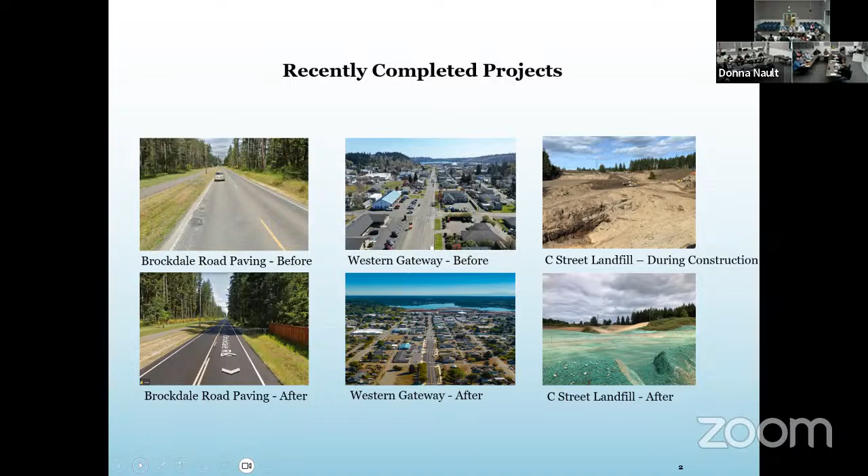So then Aaron's doing the odd slides. Aaron. That's fine, thank you. Hi, councilors, mayor, appreciate your time here. The AMI project is basically... how many connections do we have?

2,900? 3,839 meters. Got it. So part of this project is we had some old infrastructure, old meters that have been in place. Typically, the registers on those things, the battery life is 10 years. And we have basically elected to go to new metering. The problem with the older meters is they get a little bit less accurate as they get older, as the batteries die off. The other benefit is the new meters themselves, I believe, have a 20-year battery life. So we will be saving a lot of money. The other benefit, and you can look at this two ways, I guess, as the water utility, if there's better accuracy, it's going to help us as far as revenues and expense credit.

So what people see, the tendency, and we're not alone, other jurisdictions experience this when they do a massive transfer like this, sometimes revenues bump up a little bit, just because they're better metered. Our intent is we've purchased all of the meters. What we'd like to do is purchase meters, boxes, all the elements we need to do a complete swap out. We just purchased the last 400 or so units themselves. Now we're about ready to go to bid to have a contractor come in and do a lot of the work for us as far as doing those, as much as our remaining budget will allow. The parts on this project were expensive.

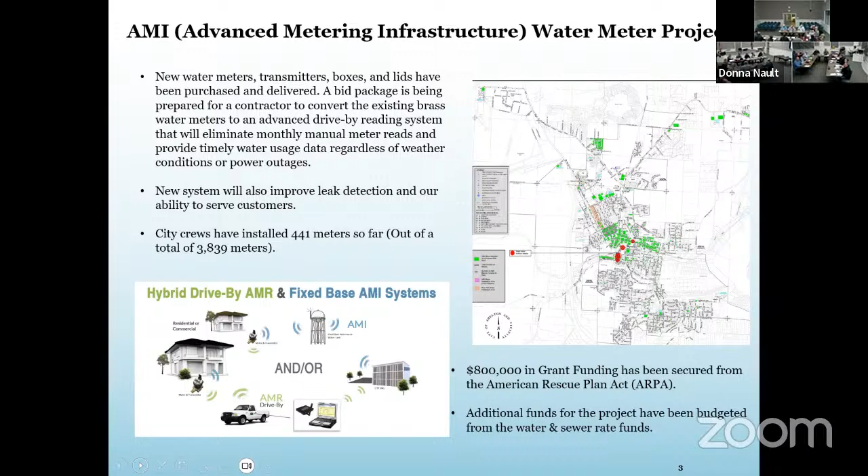So, the high school tank project went out to bid, and council awarded the bid. We had a pre-construction conference today and worked with Rognlin's to go over their schedule.

If you look at the map on the left, we're starting all the way up at Well One. We have to dig in a pipe from Well One to Shelton Springs, and we're replacing the steel line in there right now with ductile iron. Then from Shelton Springs, there's a carrier pipe approximately 20 to 24 inches in diameter, varies. It's a gravity water line right now, and we're using that as a carrier for the HDPE pipe.

So we're fusing a 12-inch HDPE pipe together. It's going to be one big long linear pipe, and they're pulling it through this carrier from Shelton Springs, near the top there, all the way down to the high school reservoir, at the intersection of K and 13th Street, Shelton Springs.

So anyway, tremendous amount of pipe work. This project has been in the capital improvement plan since the 2010 comprehensive plan. The benefit is we get a pressurized main going from Well One all the way down to the high school reservoir, whereas right now it's a gravity line and it's an old gravity line.

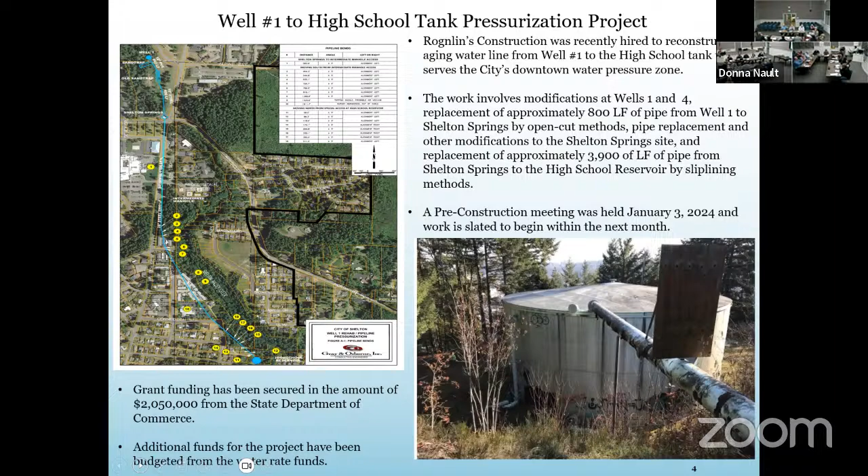So, keeping in mind this notion of our reservoirs and what we need to look for, as I mentioned to the council, and I think you all were at the last meeting—we do have some pressure issues, some fire flow issues, some storage deficiencies in our Angleside pressure zone, and that's identified as the colored area through there.

We do have this particular project, of which we were awarded about $2 million, if I recall correctly.

The intent here is, we have a booster pump station. There's an upper Angleside booster pump station right about here, and another we call the lower booster pump station, all the way down in the maintenance yard, so we pump water up to the Angleside Reservoir right now. There's also another booster pump station constructed next to the Angleside Reservoir that is offline right now.

The goal is to bring that online to increase the storage. What happened is the houses were built around the reservoir and they're not far enough down the hill, so you can't drain all the water down from the reservoir, or else you run out of water pressure in the homes.

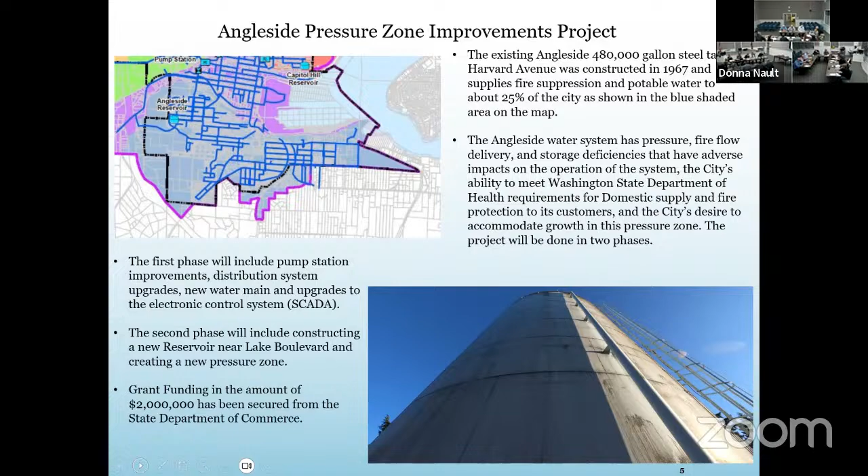So, are you guys ready for Safe Routes to School? Slide number 6. We have 3 intersections in the Safe Routes to School project.

One is up at the high school. We're going to put in a little island and a crosswalk, improve the crosswalk, and move it over to the Huff and Puff parking, the trail parking lot over there.

Another one is down—there's going to be a sidewalk down 9th Street, coming all the way down to 9th and Franklin, with a bunch of improvements there, and a flashing beacon crosswalk at Evergreen Elementary.

And then if you go down the street a little bit towards Safeway, at 7th and Franklin, that whole intersection is going to get improved crosswalks, bulb outs, and be made a lot safer.

So we got a grant from the state for $770,000. We've spent about 120,000, maybe 130,000 on design, so the remaining amount is going to construction. We're out for bids right now for the project, and we're hopeful that the engineer's estimate is a little on the high side, since the construction environment varies.

This is a good time of year to be bidding. We're hopeful that we're a little lower than the engineer's estimate. We like to walk in with a construction contract. We have the money to pay for the construction part of it. Any additional services from the design company, we have to pay our staff some money too. That's our inspectors, they come out of the project fund also. Then we like a 10% contingency on top of the project when you walk in the door.

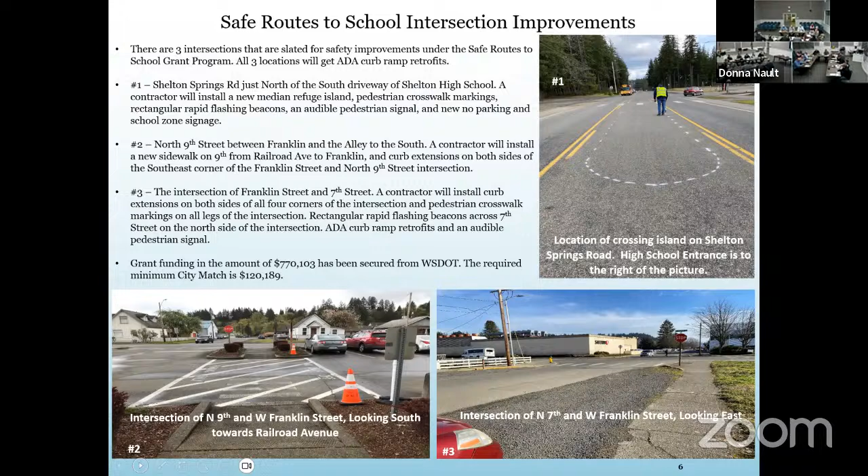Page 7, please. This is actually a combination, you guys, of 2 grants. It's a two-phase project, and I think she kind of separated it into 2. Let's start on the left-hand side. We basically got a direct appropriation from the legislature for about $3.2 million. We need to upgrade the headworks to increase the capacity and the size of the screens to accommodate future higher flows of the plant.

So this is other people's money. This is an opportunity for us to improve the headworks there. In addition, and this project is actually going to go first, the project on the right was another ARPA funded project for us. This is actually going to increase the amount of water that we can store. Currently we're at 30 to 40,000 gallons at this point. This project will add a 500,000 gallon tank to that, with the caveat, you guys, that as the demand increases for that reclaimed water, we're going to have the ability to expand and sell more of it.

So this really is kind of a future hopeful. I will tell you, in talking in my brief times with the tribes, and I've talked to some of their representatives, this is something they very much advocate for. Reason being is we're putting water back into the system. There's concerns with regard to flows in the main creek downtown as well as the others. So they have been very supportive of that.

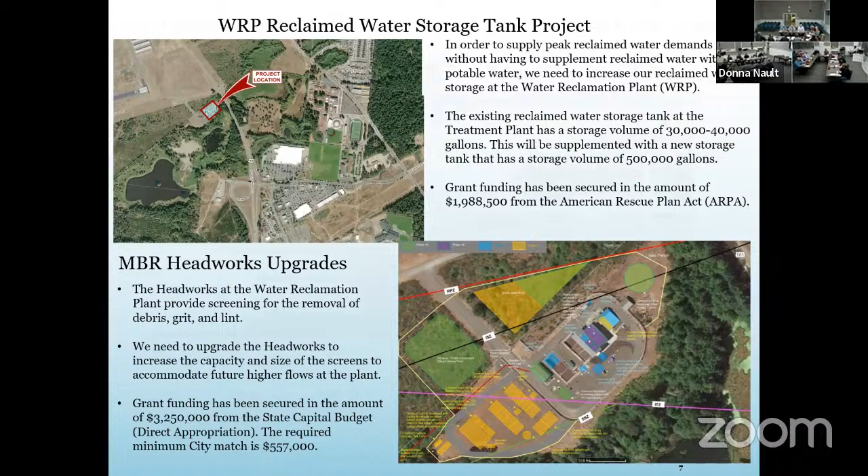One of the upgrades was a roundabout, and we have a preliminary design on that. Another competing option is potentially upgrading the signal, adding some additional right turn lanes, and putting in left turn permissives—those are the flashing yellows, where if there's no one coming and you're in the left turn lane, it turns on so you can go.

We had a meeting with the state today to talk about the intersection. A new roundabout there would be $4 million and up—they're all pretty expensive. The turn lane improvements, that's without any property acquisition. That's correct, that's just the... yeah, that should be big enough over there, it's a pretty big area.

Just so people understand, my understanding is it fails during school times, heavy peak times for schools—peak only. Other than that it seems to operate okay. That's at 2:00 to maybe 3:30, and then in the morning similarly.

So anyways, we have a traffic engineer, SCJ Alliance, looking at the intersection. They're doing some updated traffic counts, and we're getting a memorandum from them evaluating the signalization of the intersection—what's the level of service over a 40-year period compared to a roundabout, and are they similar? Because we know the signal is a quarter of the cost.

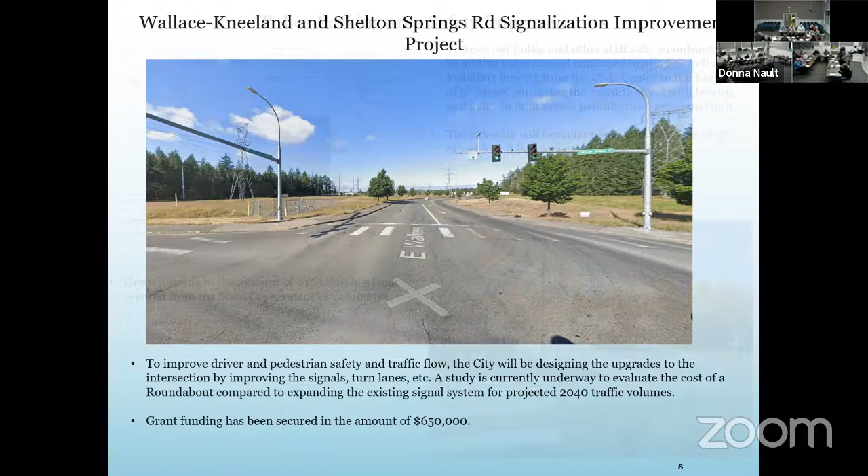Page 8. Oh, you're on 9. Nine. Long day.

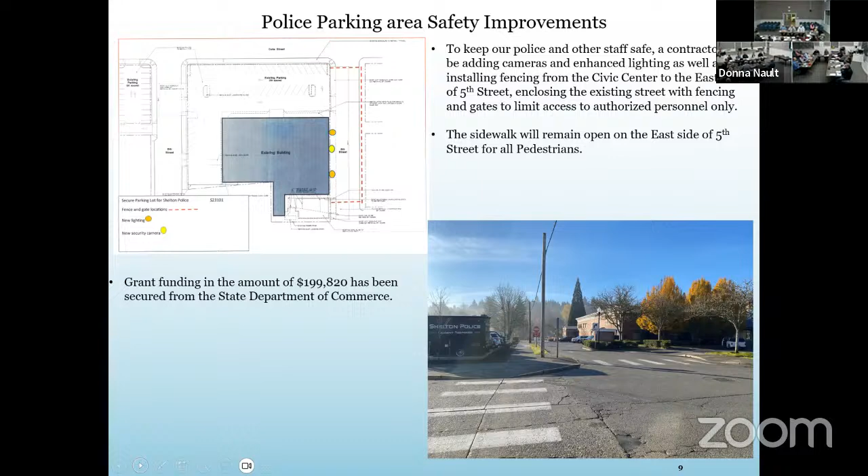I didn't mention that too, there will be pedestrian gates too, yes. So, slide 10.